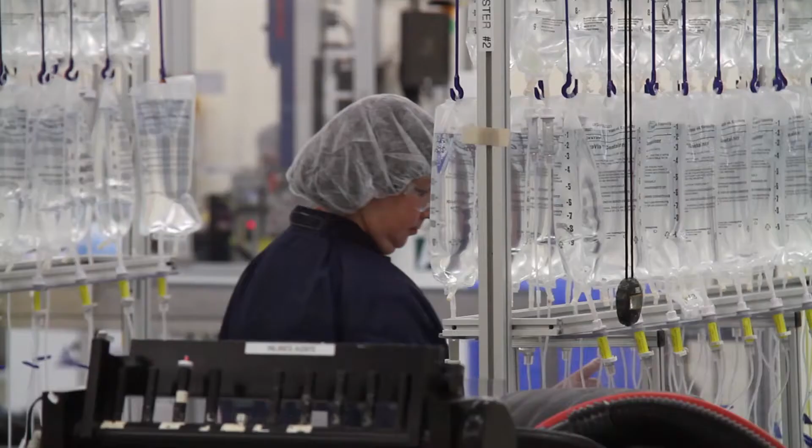A quality manager at our company rushed his wife to the emergency room. He looked over and saw the IV system that was keeping his wife alive. Then it struck him—that IV system was made of components that he personally approved. That's when you realize the impact of your work, and that there's no such thing as good enough.

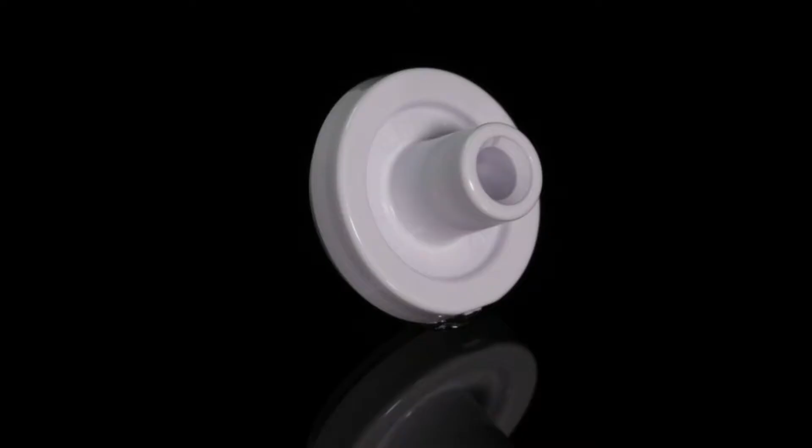Let's start with the program manager. That's my role, I'm Ryan. I am the connection between our customer and the company. It's my job to ensure that products are made correctly and on time. I oversee the design, build, and quality of molds that make products like this check valve. It feels good when I walk around stores and see things that were made from molds that I helped build. Then I realize how many people we're reaching.

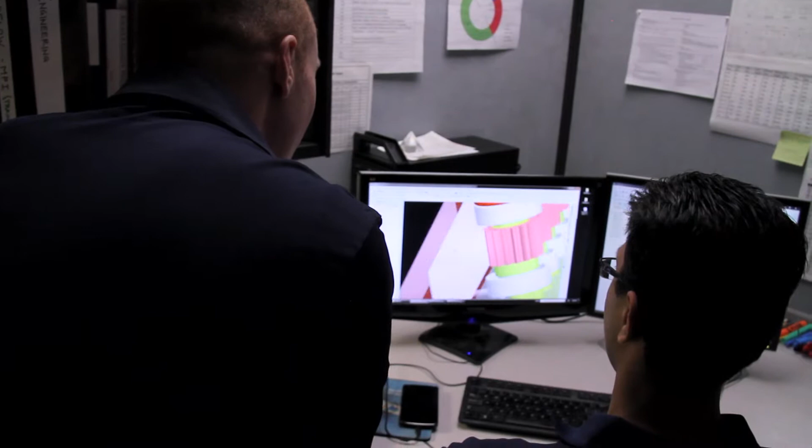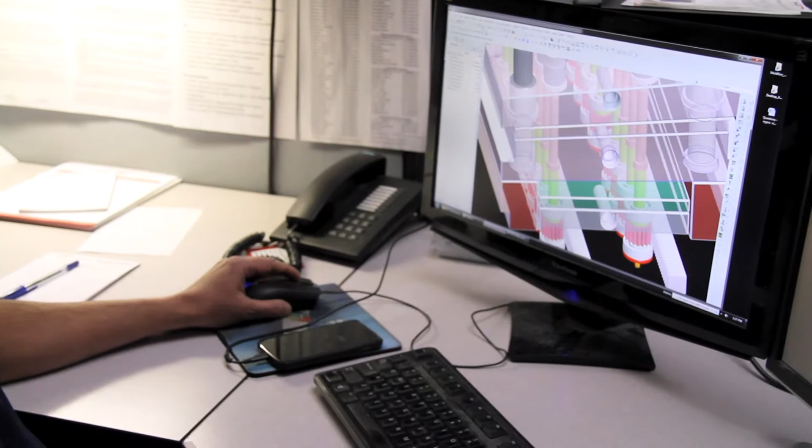Now let's go to mold design. I'm Nishit, a mold design engineer and simulation analyst. I've always noticed how plastics are used by every person on the planet every day, and then I found out that mold making and injection molding is at the very heart of the plastics industry. I was excited by the opportunity to work on a broad range of products. Not only do you need to be highly skilled, you need a wide variety of skills like math, science, communication, and computer skills to be successful as a mold design engineer.

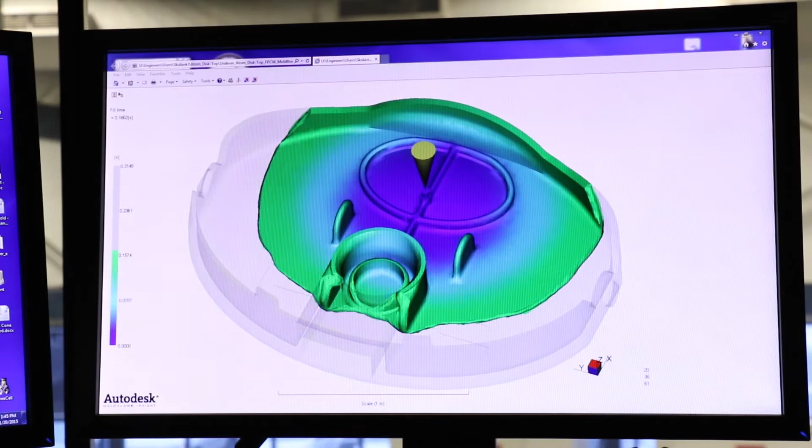I have two key roles: I am a mold design engineer and a simulation analyst. As a simulation analyst, I use computer software to simulate how plastic is going to flow through the mold. And as a design engineer, I design molds for the same parts.

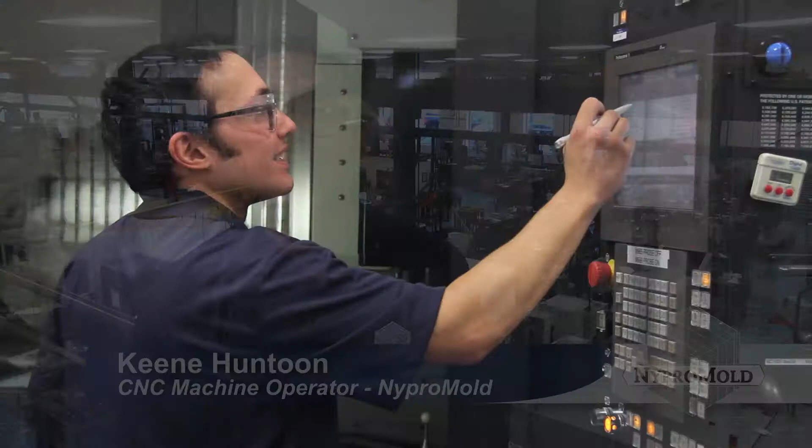Next up is machining. I'm Keene, and I'm a CNC machine operator. What brought me to manufacturing was the ability to use advanced technology. What keeps me here is the fact that it's ever-changing. My job is a crucial step in making properly working medical devices. By collecting the correct cutting tools and putting them into the right machine, I ensure that a good mold is made.

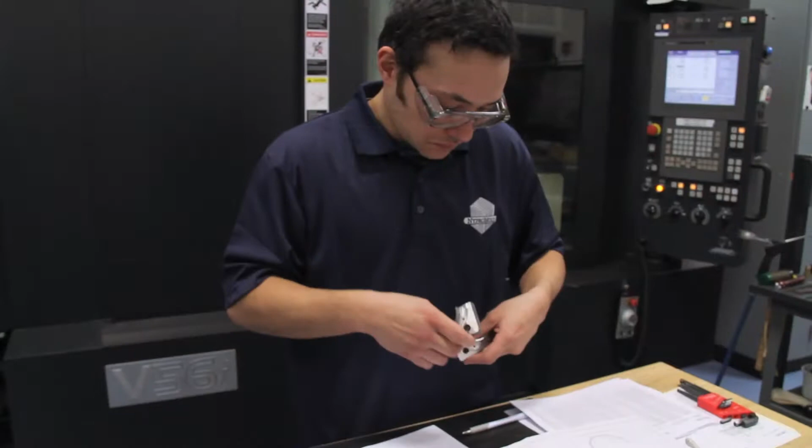I ended up in manufacturing after attending college for a couple years—direct from high school just wasn't for me. There was a job opening at Nipro Mold. I applied, got in with onboard training, and here I am now. Coolest part of my day is I get to work hand in hand with robots.

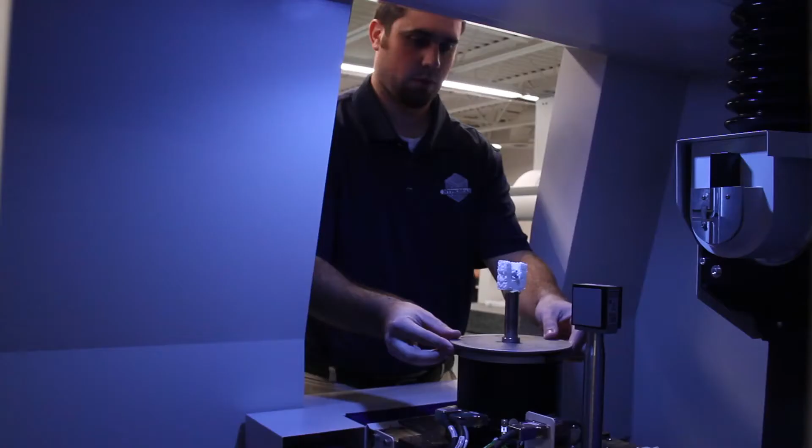And now, over to metrology. I'm Ryan Bergeron, a CT engineer in metrology at Nipro Mold. Industrial CT is similar to medical CT—it gives you the ability to look inside the part without physically destroying it. My job is exciting because I get to take part in saving lives every day. In order to prepare for this role, I earned my Bachelor's of Science degree in Industrial Technology. At the end of the day, I help determine if this check valve passes or fails.

And now, on to processing. So this whole time we've been talking about what it takes to design and construct a mold—well, here's a finished product. My name's Amber, and I'm a plastics engineer, and we're going to talk about what happens with these molds once we get them to a machine. So what we do when we run the machines: we take these plastic pellets, melt them down in the machine, inject them into the molds, and we end up with a finished product.

I have a bachelor's and a master's degree in plastics engineering. I started an internship here at Nipro when I was a freshman, and I never left. What I love about my job is the variety of things I get to do every day—some days I'm at my desk doing paperwork, other days I'm down here on the floor running machines all day long. What's really great and really fun is it's kind of like a big puzzle: what's the best way, and the fastest way, to make really good parts every single time? I would say that molding is fun, it's engaging, and it's really fulfilling.

One of the best things was when I was looking through a magazine one day, there was a medical device on one of the pages, and when I noticed what it was, it was one of the first products that I worked on when I started here at Nipro as an intern. That's one of the greatest things—saying, hey, I had a hand in making that part.

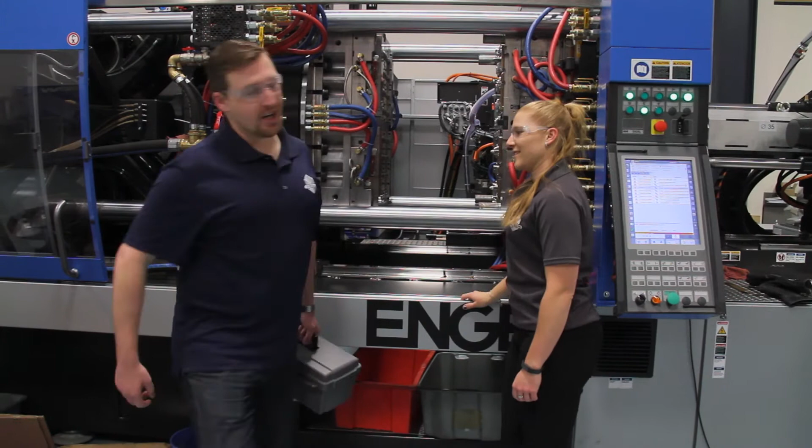Next up is the final step in the process: assembly. Hi, my name is Tim Baird, and I'm a project engineer. So when I was in high school, I participated in the FIRST program, which partners up high schoolers with different companies that do engineering. I found through there that I love doing engineering, and I went on to college for mechanical engineering, and now I build automation and robotics here at Nipro.

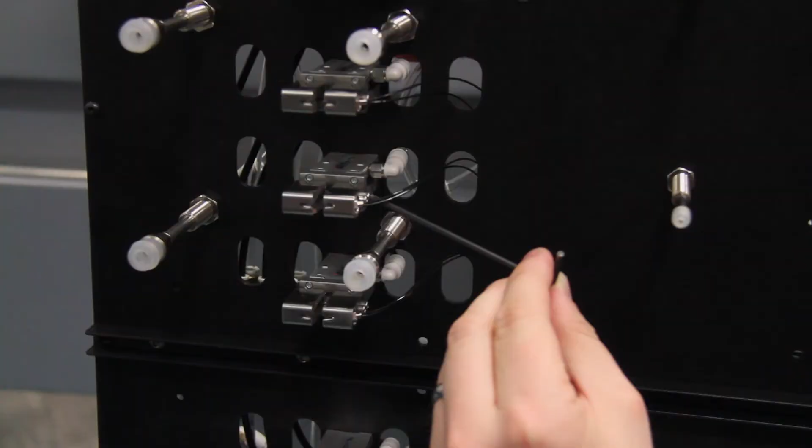The best part of my day is the diversity—I'm always working on something different, and it's never the same thing twice. During the production of the check valve, I primarily work on robotic tooling like this, which takes the molded component out of the mold and places it onto the conveyor belt for cooling, where it then goes on later for quality inspection. It's great to know that I'm contributing to patients' health.

For that one patient, this product meant the difference between life and death. We make millions of parts every year, contributing to healthcare for patients around the world. Our work saves lives. Mold making matters.